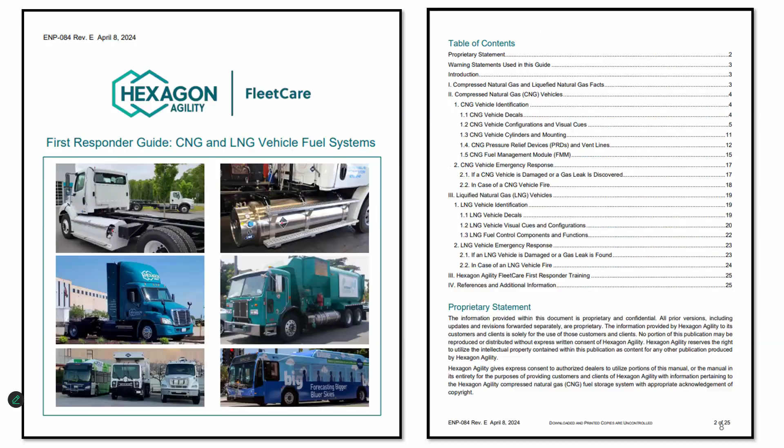We're going to see some photos and videos. The intent of this media is not to do any criticism — it's solely for educational and discussion purposes and to demonstrate things. None of my videos or pictures are meant to criticize or reflect negatively on the individuals, company, or emergencies depicted, if you do happen to identify who they are.

So I want to go into a quick Hazmat 101 view. One thing we're going to find about some of these vehicles is that we're kind of missing the foundation of what we've been taught about hazmat, and we're not applying it to these types of vehicles.

For the past year I've been trying to bring up a gentleman named Ludwig Benner. Sure, many are familiar with him — hopefully the majority are. Ludwig was considered the father of modern day hazmat thinking. He developed a couple of different things: the DECIDE process, the GEBMO, and the TRACEM acronym. A little back history: Ludwig worked for the National Transportation Safety Board, doing incident investigations involving hazardous material incidents on the highway and other transportation. He noticed a lot of firefighters were getting killed or seriously injured at these incidents.

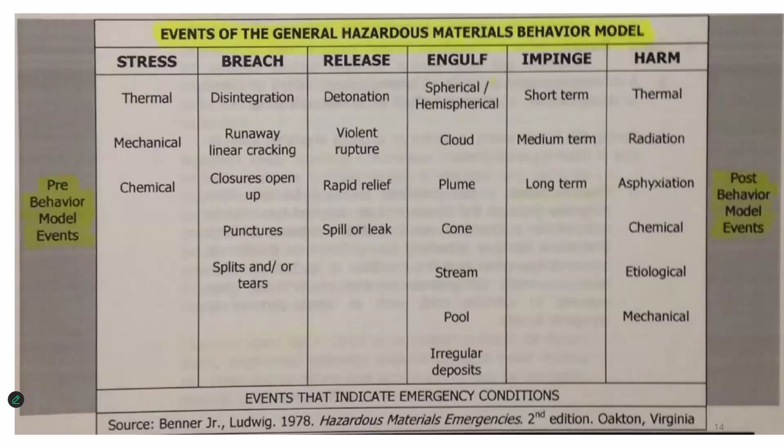Another thing he came out with was just having an understanding. We've all heard that hazardous materials do not become a problem until they get outside their container. So he developed this GEBMO model, which basically outlines the failure of a container, the type of stresses, just to give the responder an actual understanding of what's going on. And we'll see as we go through this how this ties back.

And some of the things that developed out of this were known as risk-based response. Some of you hear this a lot in hazmat classes. According to NFPA 470, it's a systematic process to analyze a problem where we analyze the container, the product, the environment, and the cause. We identify and assess the hazards, and we evaluate the potential consequences. A lot of this is based off of Ludwig's model.

So as you're going to see here under NFPA 470, we talk about the product, the container, the environment, and the cause, and we apply the facts, science, and circumstances. So pretty much my presentation's going to follow this flow.

We're going to have an understanding of the container, an understanding of the product, and an understanding of the environment. Depending where the container fails, the product release and the environment play a role, and we'll have an understanding of the cause. We want to apply the facts, science, and circumstances to the incident.

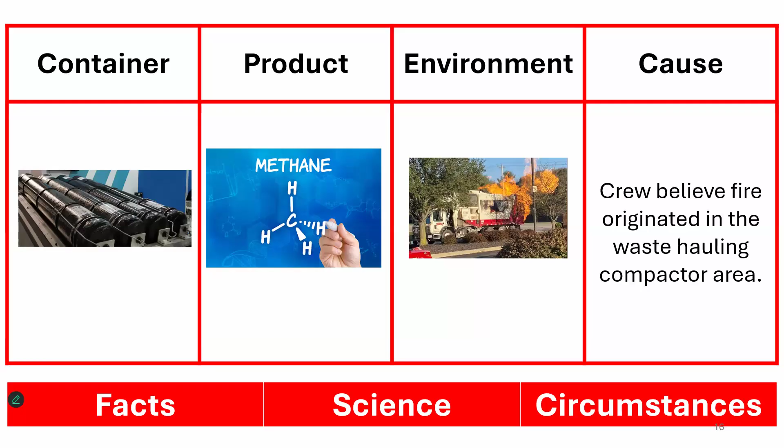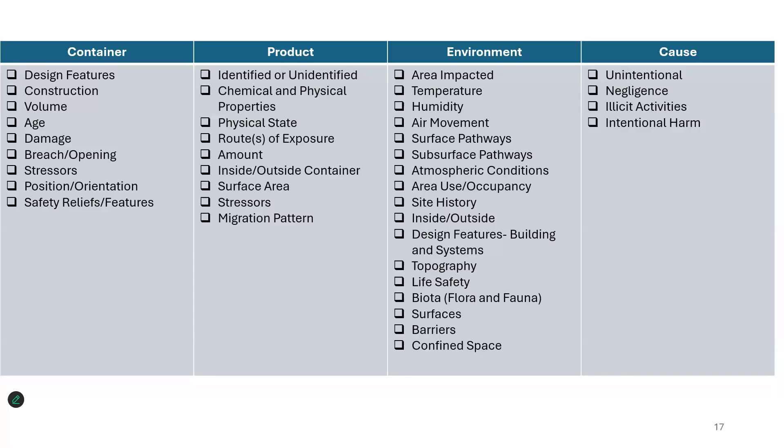Here's just another example of that. I'm not going to go through this, but more particularly you'll see as we go through this about the container, product, environment, cause. The environment is just taking a look at what's our surrounding. As you know, if these incidents occur on a busy highway, it's a completely different environment than these occurring on a country back road. Have an understanding of the cause of these incidents.

All right, so let's dive into the product side of this. First thing I want to stress to you is we can have dual fuel technology where these three fuels could be used along with diesel, so just be aware of that. Basically, a very simple bi-fuel natural gas vehicle runs on gasoline fuel, but with the flip of a switch, we can run on compressed natural gas. So just have an understanding that there could be more than one type of fuel system on the vehicle.

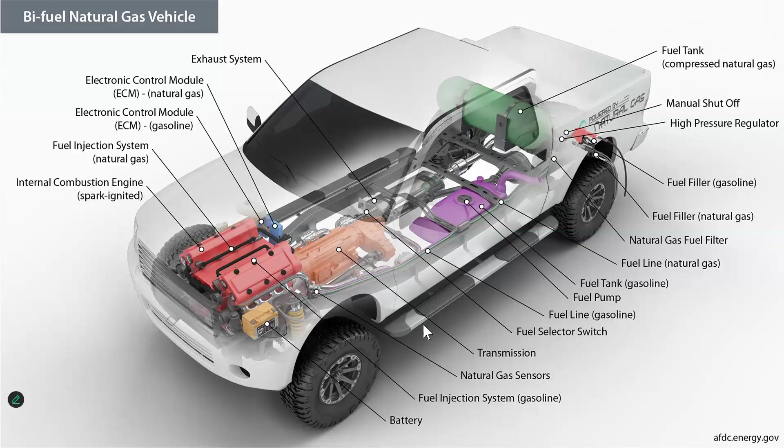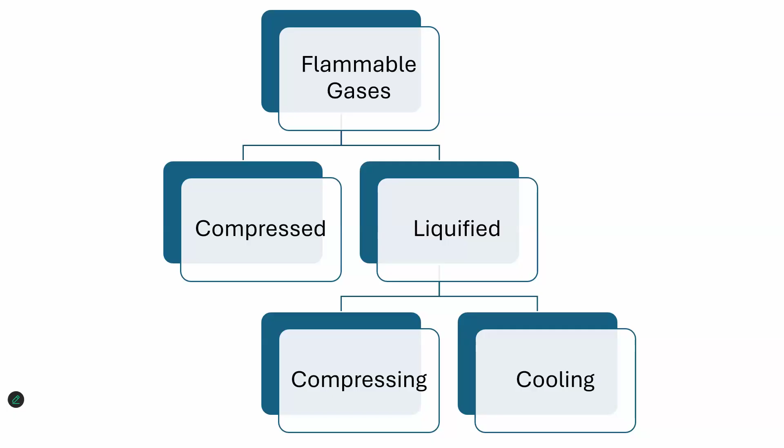You can notice compressed natural gas is a gas, liquefied natural gas is a liquid, becoming liquid through cooling, where they cool the gas to negative 195 to 260 degrees to make it a liquefied gas. Then we get to LPG, or propane, which is liquefied through pressurization.

You can see the UN numbers are different for all three. The ERG guidebook numbers are essentially the same. We understand a little bit about the flammable range, the flash point, the auto ignition, the vapor density, as we've been taught.

Natural gas is lighter than air. It's going to rise and dissipate. Propane, or liquefied petroleum gas, is heavier than air, and it's going to stay low to the ground and collect in low-lying areas. Liquefied natural gas, because it's cold, is a cryogenic liquid, so initially when it comes out it's heavier than air, but once it warms up, it rises.

We take a look at the expansion ratio between liquefied natural gas and liquefied petroleum gas. LNG has an expansion ratio 2.5 times that of LPG. Obviously, all these are flammable gases, so fire and explosion are a main concern. Compressed natural gas has high pressure associated with the containers and fuel system, and we'll talk about what that high pressure is.

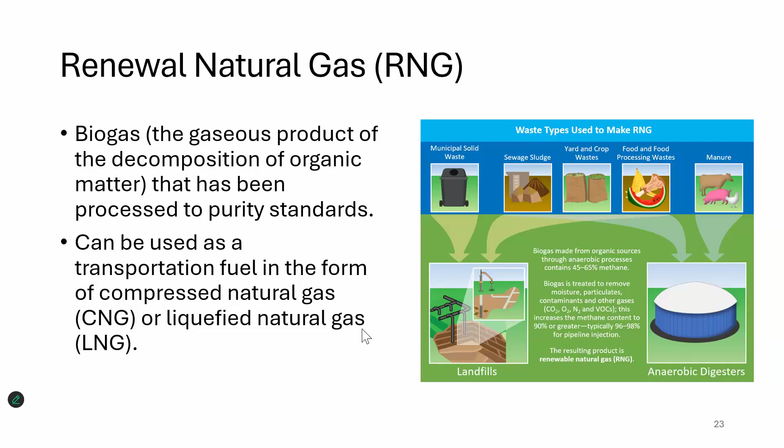So we talked about the product. Let's go in and learn a little bit about the container. Hazardous material does not become a problem until it gets outside of its container.

This is something we need to understand about these systems: pressure relief devices are devices that relieve pressure in a container before the whole container fails. That pressure release device could be temperature activated or pressure activated. CNG is a temperature activated pressure relief device, while LNG and LPG, or propane, are both pressure activated pressure relief devices.

Then we get a bit into containers. Under compressed natural gas, just as many of you have seen in the fire service, we started out with steel cylinders, went to aluminum, to carbon fiber and everything. The same thing has happened with compressed natural gas. There are 4 types, and we'll go over a little bit more about those.

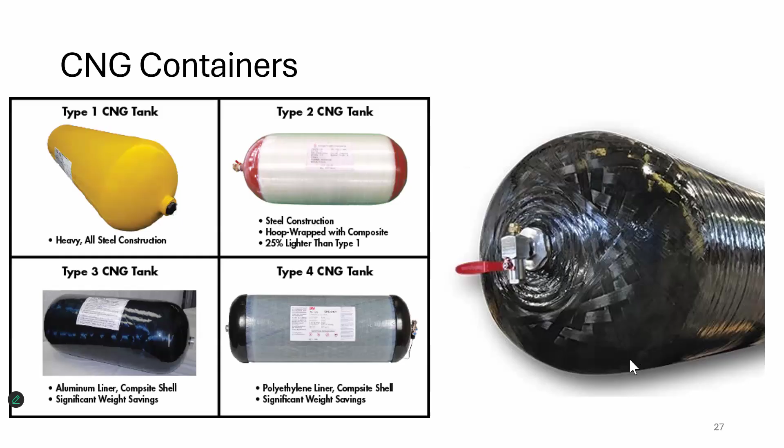The type 3 and 4 overwrap is a low conductor of heat, resulting in a nominal rise in content pressure when exposed to heat and fire. That wrap that is on these containers ignites at 650 degrees.

So what happens as these tanks get exposed to fire? As obvious, we're going to get extreme heat, above 650 or more on these. The fibers start to weaken. Another thing they talk about is if we start throwing our cold fire streams on this, that further erodes the carbon fiber wrap on these containers. So that's one concern.

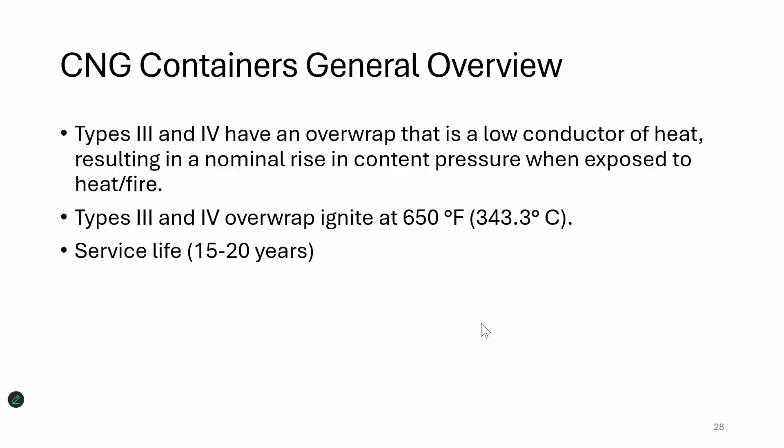The second concern I'm going to emphasize as we get through this presentation is about the CNG, where it has a temperature activated pressure relief device on it. That water could be very detrimental to that. The service life is 15 to 20 years on these containers. As I said, we'll get into this a little bit more.

We're going to talk about how these things vent, making sure they vent upwards. Some of the older systems may do that, may not. The protective caps, and also each cylinder in compressed natural gas systems has an individual cylinder valve that could be manual, electric solenoid - which is the most common - or a combination of manual and electric solenoid.

So we're going to talk a bit about the location of these containers. CNG, we're going to start with that - if we remember back to our poll, it was number 2 on our list. These CNG containers can be mounted on the side, front mounted, side mounted, front body, roof mounted, or mounted behind the cab. Various locations they can put these containers on the vehicles depending on the specific container.

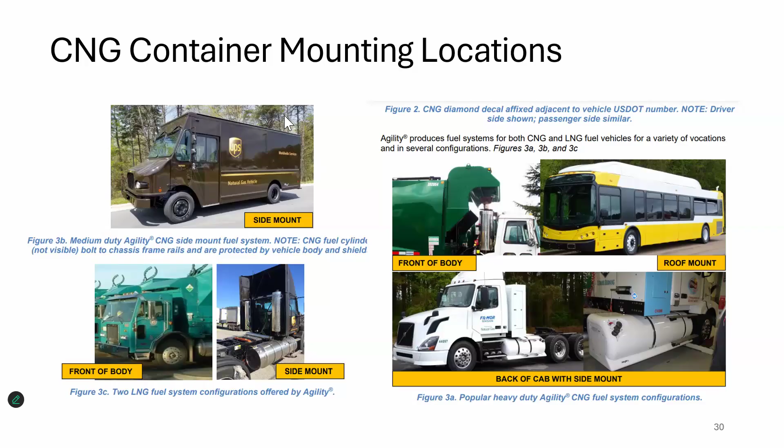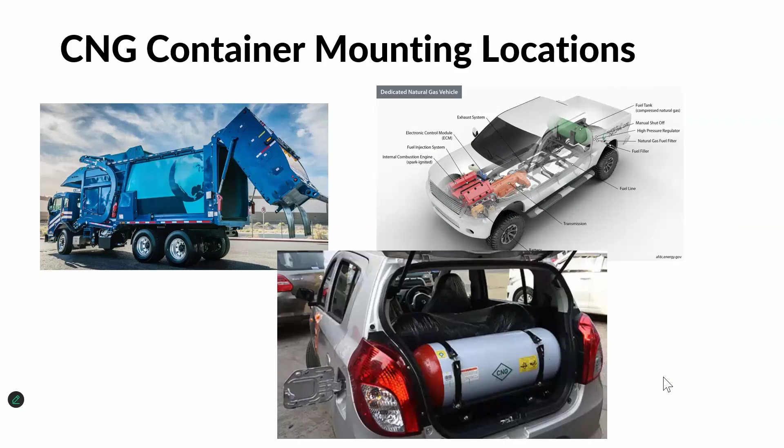So some things about LNG: LNG venting is considered normal. As the day heats up, if this thing was filled early in the morning or late at night and the sun comes up and heats it, it may start to vent off. It's not a problem unless it's considered excessive.

Also on these tanks, I'll show you some upcoming pictures, there's a red liquid valve, which is basically the valve that takes the fuel to the engine. Then there's a gray valve, which is normally closed and is opened when fueling to relieve pressure. So as you fill this thing, you have to open the valve, then put fuel into it to relieve the pressure.

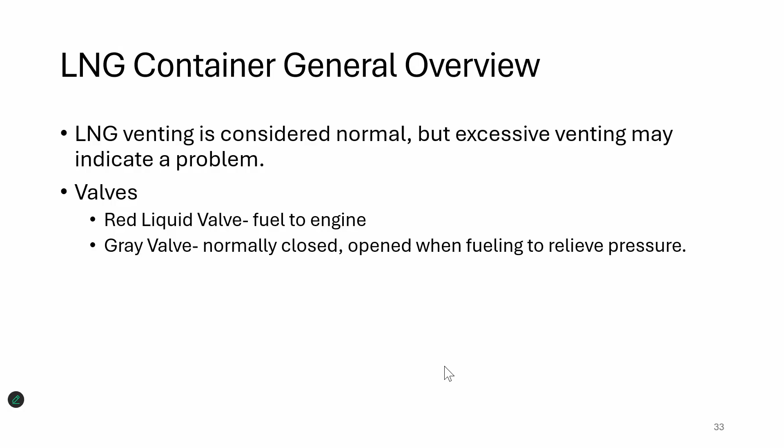As with any container, it has a backflow valve and an excess flow valve that only allows the gas to flow in one direction. And if it's too excessive, such as if the pipe gets sheared, it'll shut itself off.

The key thing on this LNG too is you're going to find a pressure gauge on it. The pressure gauge is not an indicator of fuel level. A full tank could read 0, and an empty tank could have 230 psi, with stainless steel fuel lines on these containers.

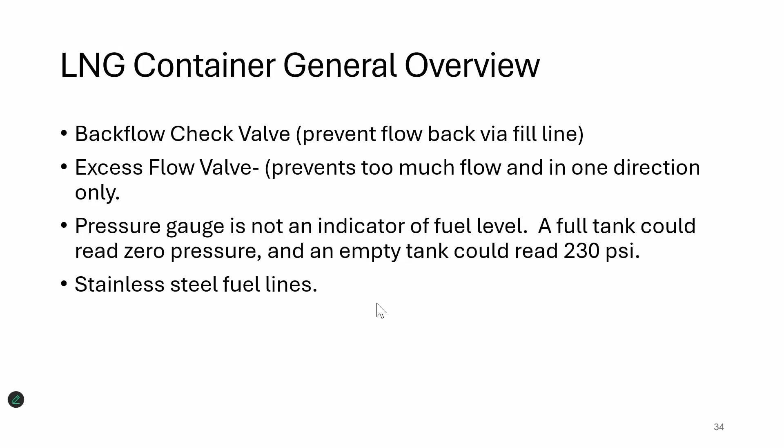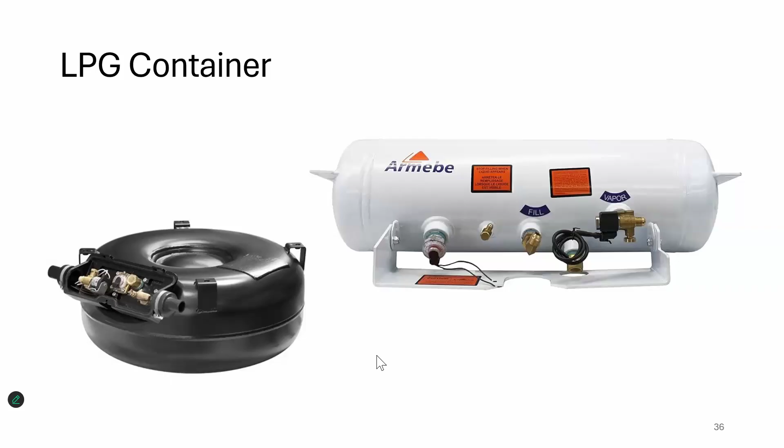With the propane type containers, it could be mounted under the bed of the pickup truck, in the trunk of the vehicle, or under the undercarriage between the rails, which you may see on buses.

The one thing to understand too is propane or LPG containers will never be mounted on the roof of a vehicle, because we understand the vapor density of propane. If we have a leak, where is it going to go? It's going to seek low. So if it's on top of a bus, where is the propane going to leak? It's going to go into the passenger area. That's why propane is always going to be in a lower part of the vehicle.

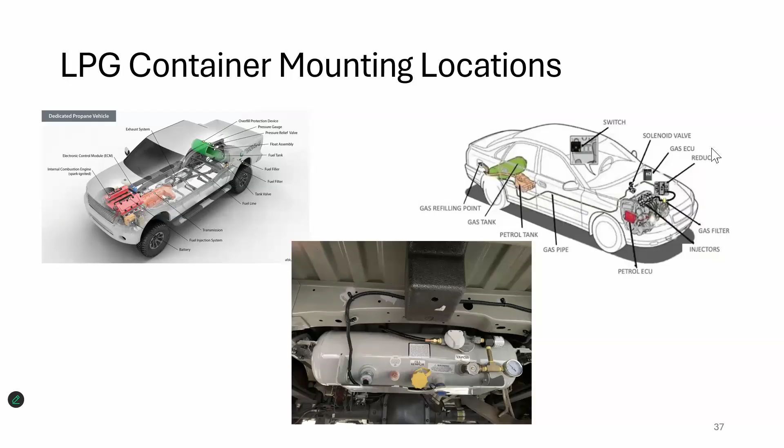All right, so we went over the containers. I've covered a little bit about pressure relief devices, but I want to go over this. This is some critical things we have to understand with these vehicles, particularly with the CNG vehicles.

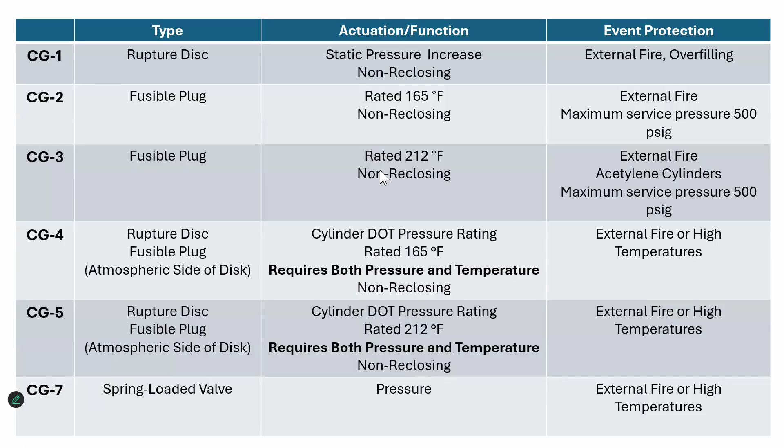All right, this I'm not going to go through, but this is just a quick table that sort of goes over these. So very simple: thermally activated devices, the heat melts a fusible type metal or anything like that, and we have the gas release. It does not reseal back up. Once it's open, it's open.

It's a non-reclosing device. Another thing to understand about these temperature activated devices is it depends how they are installed.

If they're installed somewhere on the tank and the heat hasn't gotten to it, it could potentially fail the container due to the positioning of the fire. Also, these devices may be minimized or ineffective or not go off as soon due to cold temperatures or wind.

So temperature activated devices are non-reclosing. The next type is pressure activated, where internal pressure in the tank operates a spring, it opens up and releases the pressure. If the pressure goes below and has no more thermal stress, it will shut itself back up again.

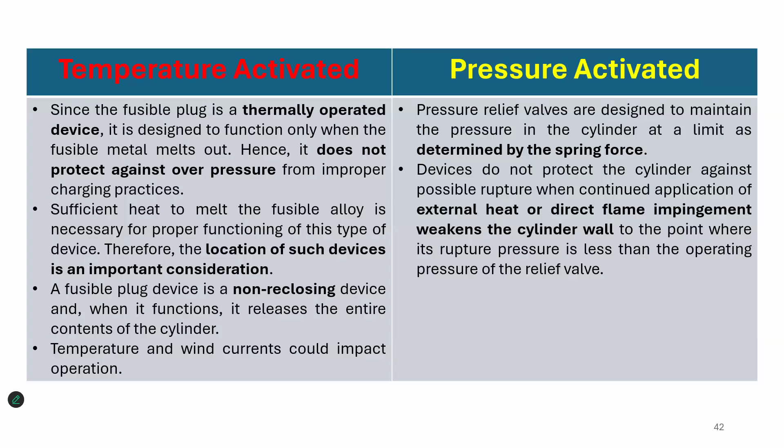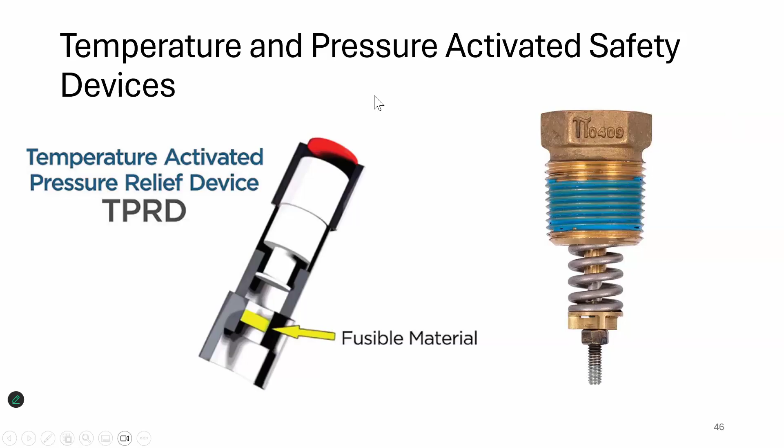This shows the difference. Temperature activated has a fusible material in it, and the pressure activated basically has a spring on it that operates to open and close as the pressure increases. So you can see here a little bit of a diagram.

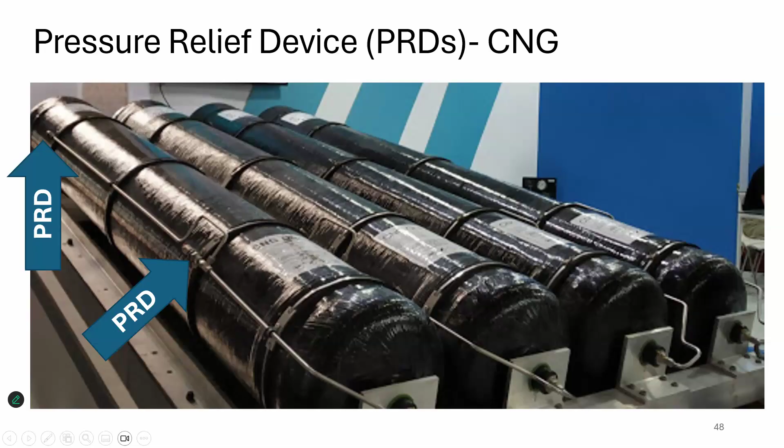One of the earlier issues when these trucks came out, there was no rule on how they could discharge. Some of the trucks could discharge out the side. As a fire service, we're like, well, time out - that can cause some serious harm. So now they're requiring that they go up in an upward direction at a somewhat safe distance.

A lot of the guidelines say 80 to 100 feet back from these pressure relief devices. I'm more about, okay, let's do the 330 feet with the ERG and kind of take it from there, be a little safer, because if we have some kind of a failure, that container, that 80 or 100 feet may not be adequate.

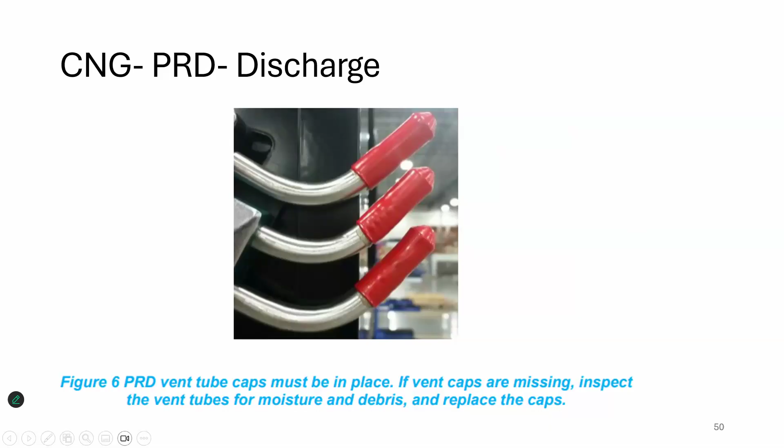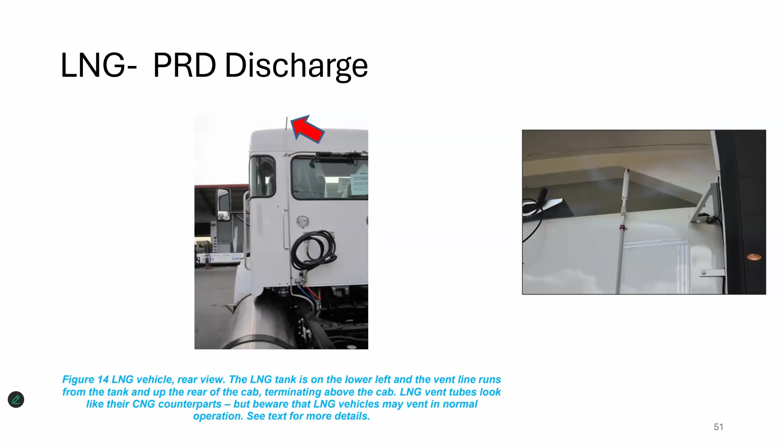Still, if we do get called to a truck stop and one of the things is off-gassing, we just got to make the determination - is there a failure in the device or a stress on the container, or is this just normal operation that there's nothing wrong with the system? It'll eventually close itself up as they start moving on, all right? Also, we can have one down here on the container itself, a pressure relief device indicated here with the red wrapping.

On propane, one thing is it's spring operated. On the buses, it's generally got to be down right on the tank, so you're going to have something underneath of it.

Quick review, especially with fire stream applications. As firefighters, what do we want to do when we see fire? Take that Chesapeake, Virginia incident where they basically let it burn off before doing anything. That's the idea, because if we start applying water stream to that fire and get onto the tank, applying water to the temperature-activated device, we cool it and prevent those fusible alloys from reaching activation temperature. If we prevent that from happening, the container can experience a catastrophic failure.

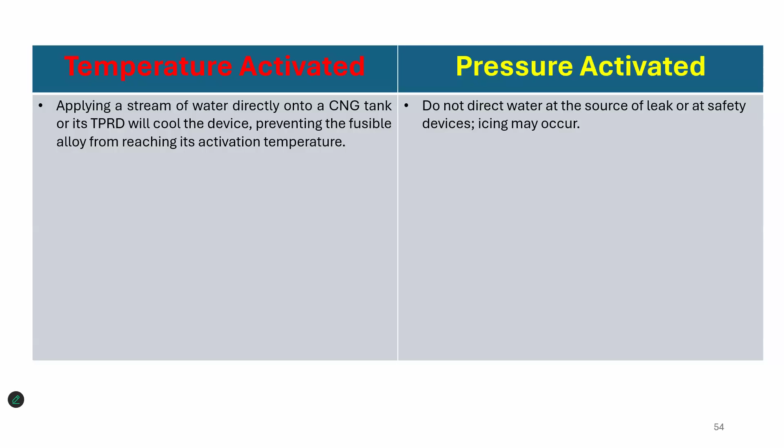On the pressure-activated devices, we've got to be careful where we're directing our water so we don't cause icing or anything to form on the pressure relief device.

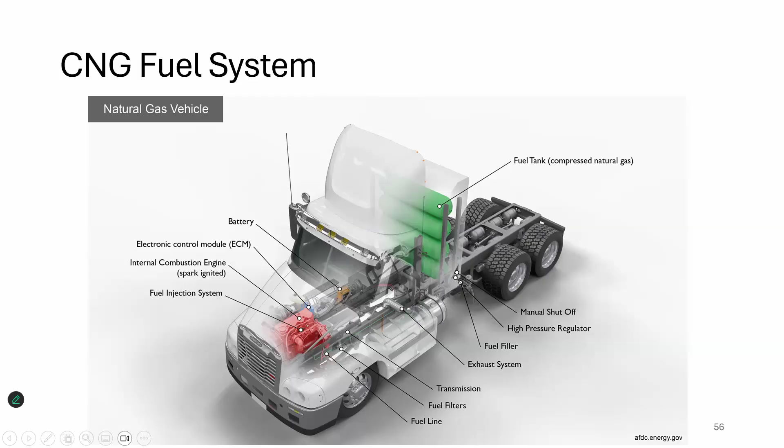All right, components and systems - a little bit of an idea about component systems for CNG. We've got to have an understanding here. Take a look, there's a high pressure side of these containers, there's high pressure lines you can see. Then it comes down here and goes to a fuel management system that reduces the pressure to 125 to 135 PSI. This shows you one of these pressure fuel management systems.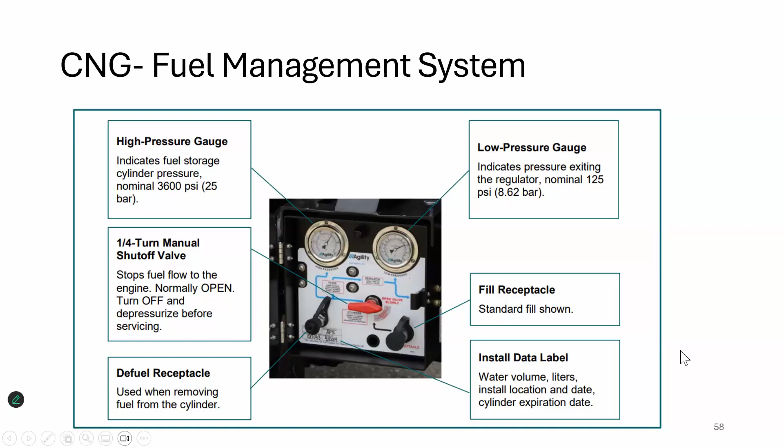The key thing right here in the center is what's known as a quarter-turn shutoff valve. That is, for us in the fire service, part of the immobilization and disabling of the vehicle - a valve that we operate. The fuel lines are going to be some kind of stainless steel type thing, and there may be some flexible hose in those.

We talked about the valves. The valves could be manually operated, they could be electrically operated with a solenoid valve, or they could be a combination of both.

With the solenoid, basically when the driver turns the key on, it opens the solenoid valves and allows gas to come out of that cylinder. If you shut the vehicle off and disable it, and they're electronic solenoids, it shuts down the gas at the cylinder. Each valve also has a shut-off valve on it.

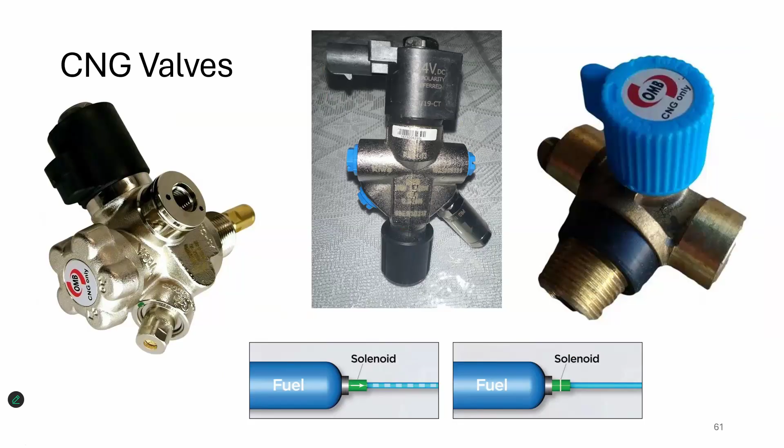Just so you can be familiar with this - it could be part of your size-up, seeing how the piping runs with these, the stainless steel piping, the shut-off valves. Give you a little bit of an indicator what this looks like.

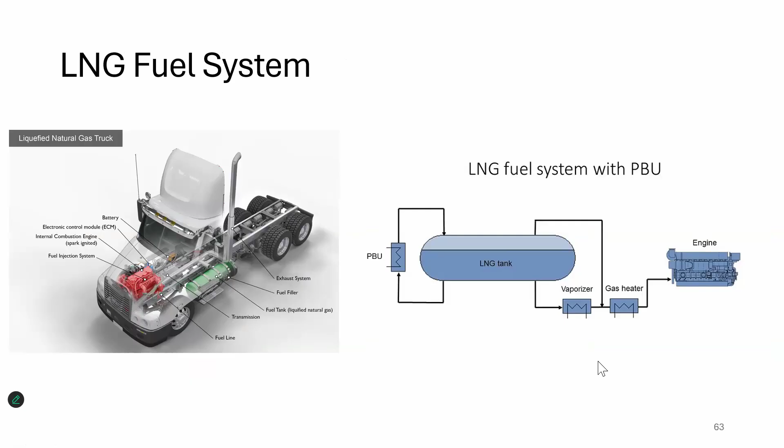On LNG, basically you have the tank, you have a vaporizer and a heater that takes that liquefied gas, heats it up, and gets it to a gas so it can burn within the engine. LNG, obviously, the size and shape depends on how much overall fuel it is hauling. This shows you a little bit about the working.

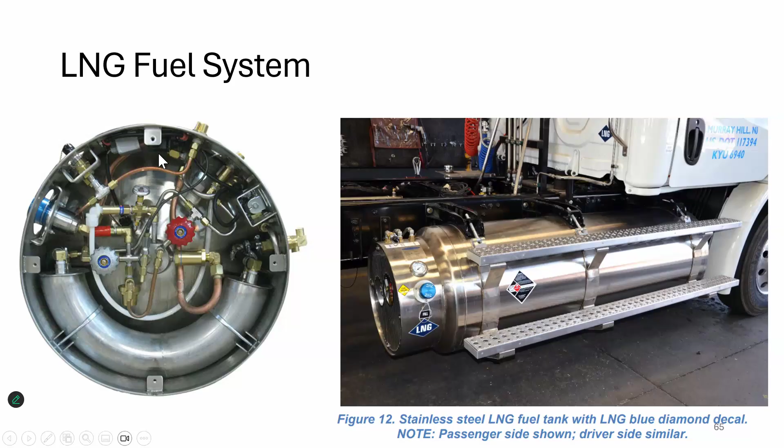Just more things that show you a little about the configuration, the valves, the gauges, and the vents on these systems. And just more on that.

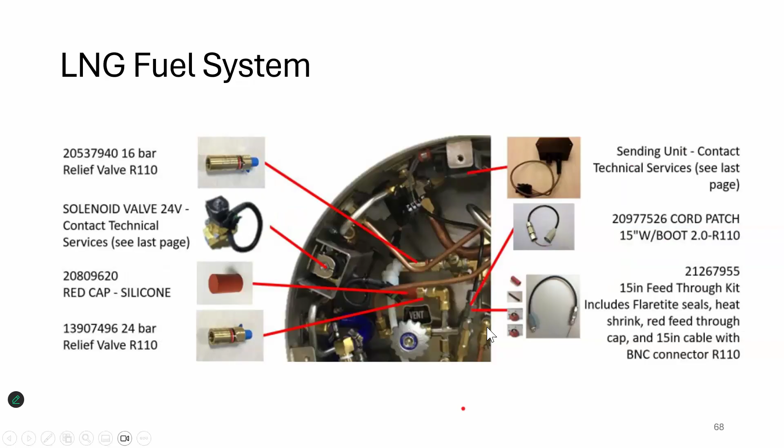One thing I failed to mention when I was talking about LNG versus CNG versus LPG - as we know, natural gas in its normal state is odorless and tasteless. So when we put it into use, we add an odorizer to it, similar to what we're familiar with in our home, and the same with propane. So CNG and LPG type vehicles will have odorized gas.

LNG gas, due to being a cryogenic liquid, is non-odorized. So as part of the requirements on these trucks, they have sensors installed inside and outside the vehicle, and they will give an alarm at 20 to 30% LEL - an audio alarm.

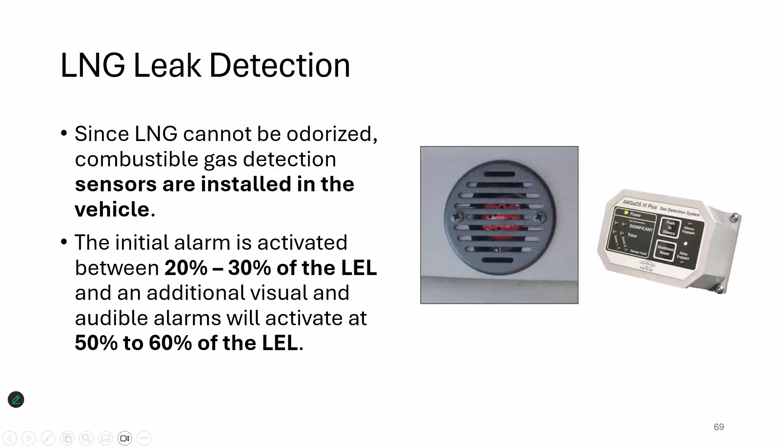That'll also be an indicator that you have a potential leak: these leak detection alarms that are located, in this case, in the cab. This is just on the LNG, because it's not an odorized gas. So with liquefied natural gas, we shouldn't be using odor as any indicator of the presence, migration, or severity of a leak. That's where we're going to talk more about detection and monitoring.

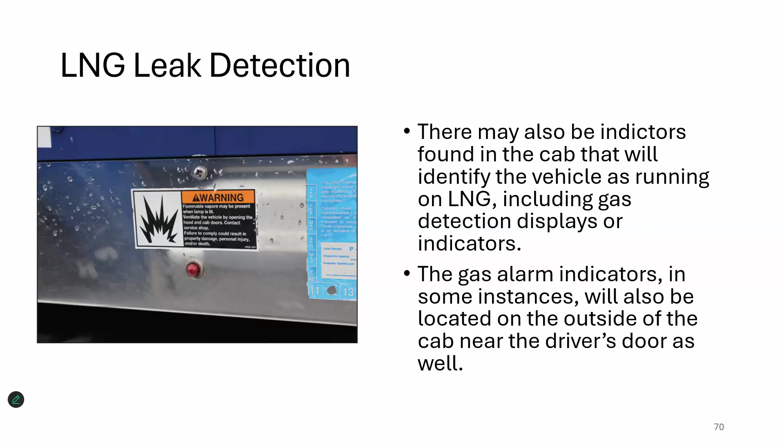So we're going to talk a little about BLEVE hazard. I mentioned BLEVE hazard for liquefied petroleum gas, or propane, and LNG. Real quick review on BLEVEs: for a BLEVE to occur, we need a liquid, we need a closed container, and we need that liquid to be heated above its boiling point, which increases pressure, and we need some kind of structural failure to that container.

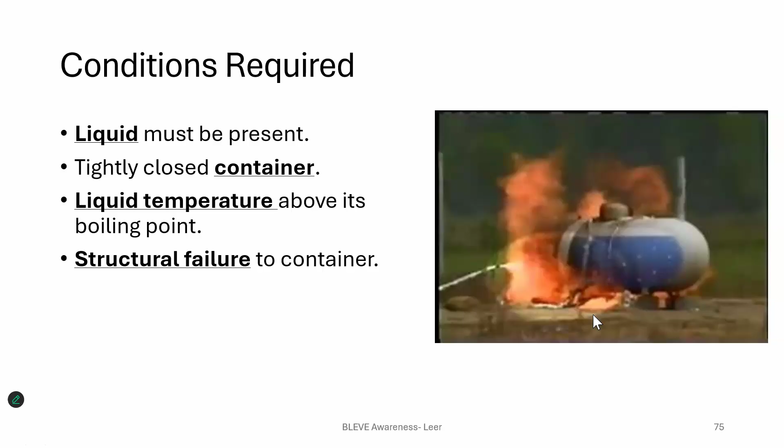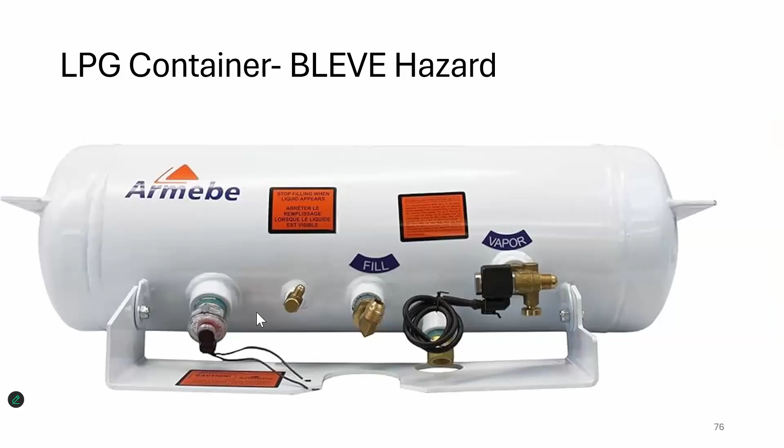Obviously, if we have an LPG-type vehicle, the BLEVE hazard exists. Not going to go much into that. But the one thing I want to hit on is LNG - this depends on where you read it. Some say BLEVE hazard, some say no BLEVE hazard. The reason some say there's no BLEVE hazard is due to the double-walled container design and the cryogenic nature, which limits exposure of flame impingement on the container itself and the liquid. That does not mean it's not going to happen. For example, if there's some kind of stress or mechanical failure on that container, that can increase the potential of a BLEVE hazard. So always consider a BLEVE hazard associated with these vehicles.

Before I move on - I went over the product, the container, a little about the vehicles themselves. One thing that when Ed and I did the podcast, we talked a little about leadership on this. So what can leadership do?

Most important: training and education. Can you get this? This is just a very high-level type class, giving you a little understanding of it. I'm going to give you some additional resources out there if you want a more detailed or hands-on program. So training and education is important.

Many of you expressed that you have these facilities, either refueling, staging or parking, or operation. Do a facility tour - go to them, meet these people, especially these fleet people. Have an understanding: if I do have an incident or a fire, let them understand your capabilities, your limitations, what they can do. Don't have your first handshake with these people when things are going bad on the street - have that talk with these people before the incident happens.

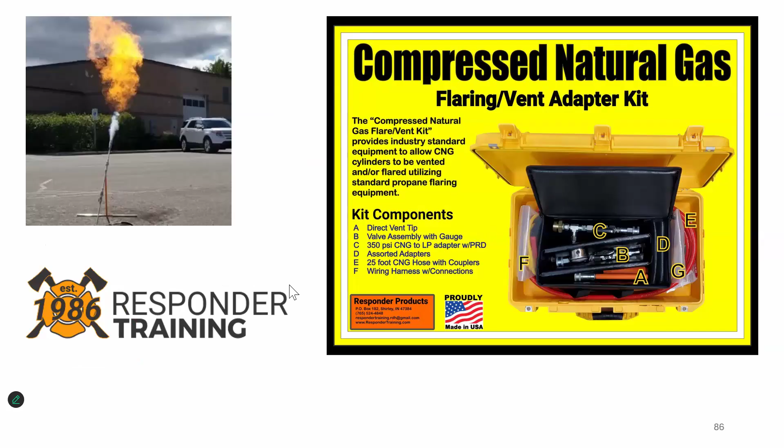Now let's back up here a little bit. As I said, building those stakeholder relationships - get a relationship with your fleets or users. Have an understanding with your tow and recovery services that they just can't come hook these vehicles up and tow them back to their yard. They need to understand there are hazards associated with this. Contact your hazardous material team, find out about their capabilities, or a cleanup company.

All right, one thing on a lot of these vehicles - have you seen with the Hexagon Agility and some others, they have an emergency response guide with them. Some are 20 pages, some are 1 to 2 pages. They're basically a guide for us first responders that give general guidelines on what to do, what not to do, and how to identify the component.

I'm a big proponent, with all this alternative energy in our homes, businesses, and on the road, that the fire service start to look at this from the hazmat side. Assign a science or research officer who can obtain reference sources and provide information to the incident commander - like, this is the vehicle, this is where the shutoff valves are, this is where you can and can't cut, you should not lift or stabilize here. Assign someone who can get that information through a tablet or laptop and get it to the incident commander to work with them on these vehicles.

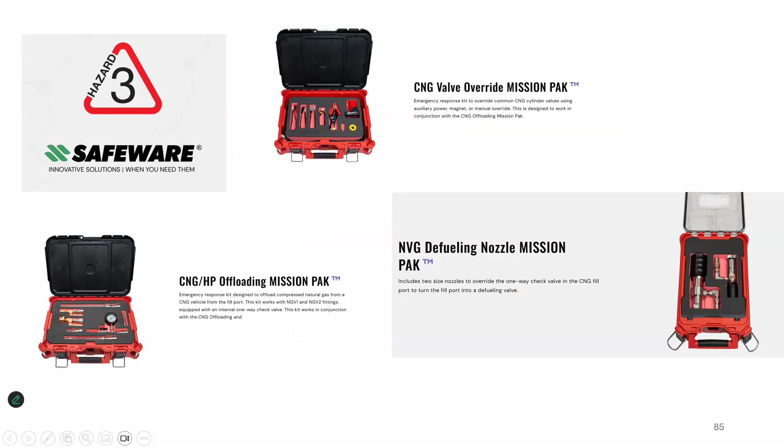Resources, which we already got into, on these types of vehicles. So just stressing some things we need to do ahead of time to prepare ourselves. It's a low frequency but high severity, or high concern, situation.

So as we go through this, let's close a little bit on this webinar. We're going to finish up, probably the last half hour or 45 minutes, on response. I just want to wrap up - I'm going to stray off here a little bit.

Many of you, if you've sat in on Commissioner Mann's and these Provident webinars, know they always talk about the NIOSH 5. You could take a look at this, and I'm sure some of you can think of cases involving these, especially compressed natural gas vehicles, where firefighters got injured. Improper risk assessment - not taking the time to get an idea of what we have, what the hazards are, what the behavior is. Lack of incident command, lack of accountability, inadequate communications, lack of SOPs, and failing to follow your established SOP. You can see all 5 of these apply in some ways to these alternative vehicles.

I know we've all been through the EV hybrid vehicles, but applying these a little bit more. Don't get into tunnel vision on these, especially these larger trucks.

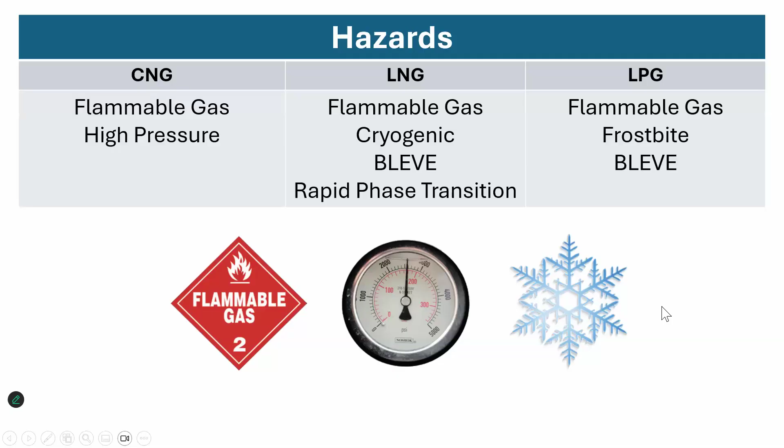As part of our response, I'm going to go back a little bit. Assign a research or science officer. Always consider alternative energy sources until thoroughly ruled out - that could be motor vehicle accidents, motor vehicle fires, structure fires, automatic fire alarms. We need to start putting alternative energy considerations in our size up. We understand solar panels, battery energy storage systems, but start thinking that way too to rule out the hazard, because often they're overlooked.

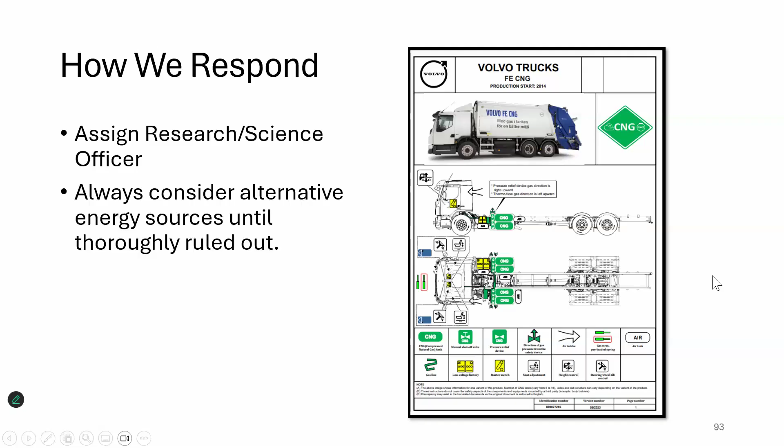One example is what's called the Emergency Response Guidebook for these vehicles, and it's basically what I call a safety data sheet. It shows you the tanks, where the shutoffs are, and the hazards. This is just one sample page from it. There's also, as I pointed out, the Hexagon Agility First Responder Guide for these systems - these quick cards that they have out there for us.

The one thing I want to talk about is the ERG - the bulk guide is more for bulk loading or bulk shipment of these materials. As noted at the beginning of the presentation, Guide 115 is what we use for compressed natural gas, liquefied natural gas, and propane. I just want to call attention to a few things in this ERG book that relate to this topic. If you look in the ERG book, under fires involving tanks, cool containers with flooding quantities of water until well after the fire is out.

Just remember, thermal activated pressure relief devices - if you start flooding that tank, you start flooding those thermal devices, you keep them cold so that they don't activate and you get a pressure buildup. So just be cautious of that type of hazard.

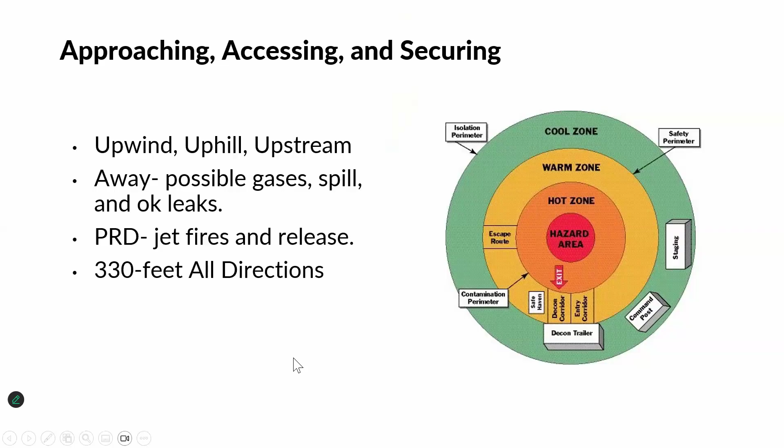Obviously with these, life safety is number one, followed by incident stabilization, then property and environmental protection. That's known as LIP. You arrive on scene, assess the product, the container, the environment, the facts and science. You analyze the problems and hazards, make your decision, develop your incident action plan, implement the response, assess your progress, and maintain situational awareness.

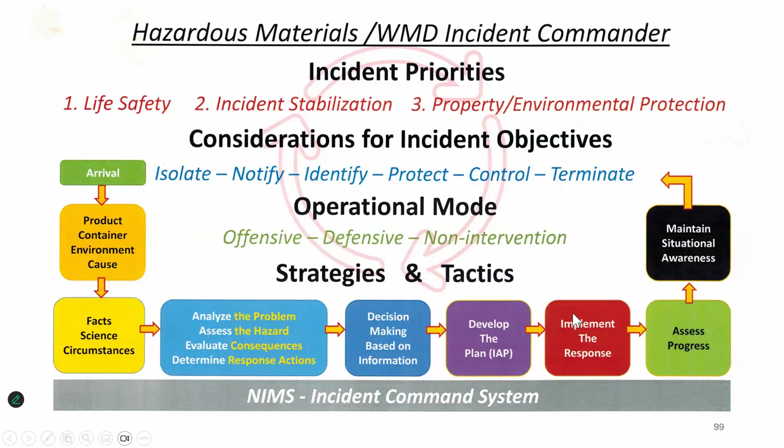All right, we're dealing with flammable gases. Detection and monitoring sampling equipment is important. If we have a leak involving these vehicles, or a fire, we're doing monitoring. I'm a big proponent of layering detection devices.

The majority of us have the multi-gas meter, like the MSA Industrial Scientific, RAE, which does a percent LEL, H2S, and oxygen reading. Remember, that device is an area monitor. It's not always going to detect low levels.

That's why when we go to these gas leaks, we can smell the gas, or know there's a gas leak, but we're not getting a hit. Then the gas company shows up with their device and they get a hit. That's because they're using a leak detection device, which is a different detection technology.

So I'm a big proponent of this, particularly with my fire department. We run the multi-gas meter for area monitoring, and we also run this leak detector.

Another interesting device you'll see here is a methane leak detector. It uses a laser and only detects methane, and it can shoot up to 100 feet. So if I have a truck with compressed natural gas or liquefied natural gas on it, I can stay back 100 feet and scan that truck, and it'll tell me if there's a leak coming from it.

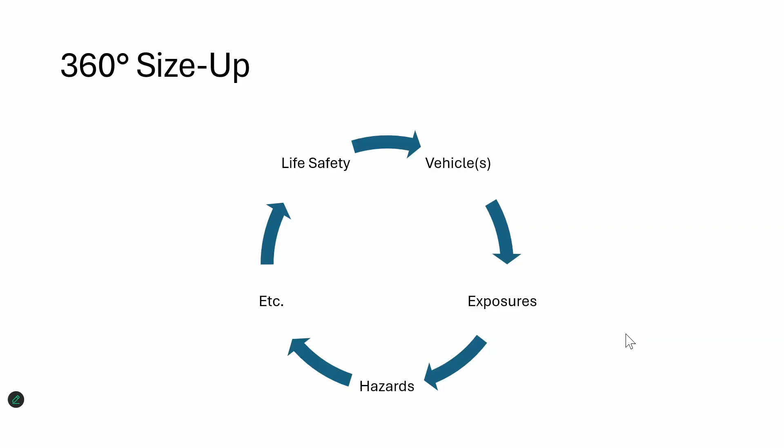This comes from the NFPA manual or student manual on responding to these incidents. So basically: identify, immobilize, and disable. We want to identify the vehicle type, the fuel type, etc.

We want to immobilize, basically prevent it from moving. We want to disable and shut down the vehicle and secure our fuel sources. All this means we must have plans in place, assignments. Thing I like to verify too, trust but verify. If the driver tells you they shut off the valves, trust but verify, because you want to make sure the valves are shut and they didn't make any mistakes in the incident.

All right, basically hazmat 101 stuff. We have all learned the 7 clues. Not going to read through all this, but you can see how we apply occupancy and location. So we talked at the beginning, highway - a lot of us identify highway or roadway systems where these things are coming through, truck stops, parking lots. Take a look at the containers, the vehicle designs, the fuel management system, refueling connection, fuel lines, markings and colors, brandings, marketing, emblems - think green, think clean. We run on clean burning natural gas vehicle.

We'll talk a little bit about the placards and labels, the blue diamonds at the back of the vehicle indicating CNG, LPG, or LNG. Written resources, the manufacturer response guide. I also throw in there interviewing the driver. Our senses - looking at fire and leak behavior, hearing that leak gas noise, that jet flames, little or no smoke, and I'll show you some examples of that. And getting to our modern detection devices, flammable gas sensors, catalytic bead, metal oxide, using our thermal imager camera.

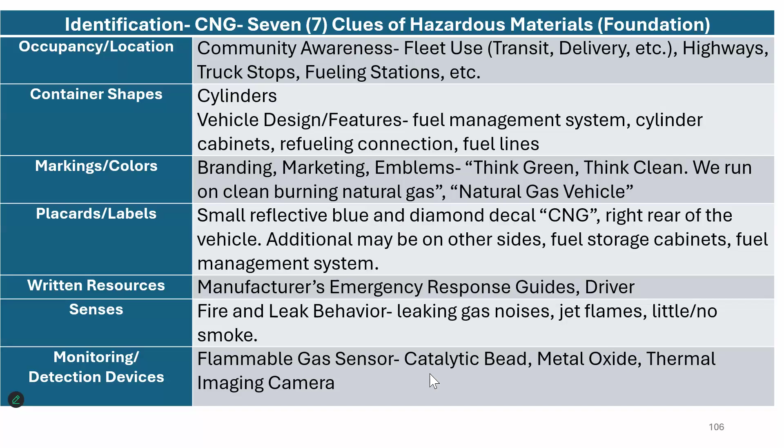All right, as I said, identification - we want to use as much things that we can. The driver, badging and labeling, branding and marketing, the containers, the fuel system, fire and leak behavior, doing that 360, getting a thorough understanding of what we're dealing with. As I go back to it, consider alternative energy until you thoroughly rule it out.

Here's an example, these are the blue diamonds. You're going to typically find them on the back passenger side of the vehicle or maybe on the container themselves, depending. So the top is for LNG - I'm sorry, I missed the CNG is wrong on that - the LNG, the propane. Then you can see the DOT, this is more for bulk loads.

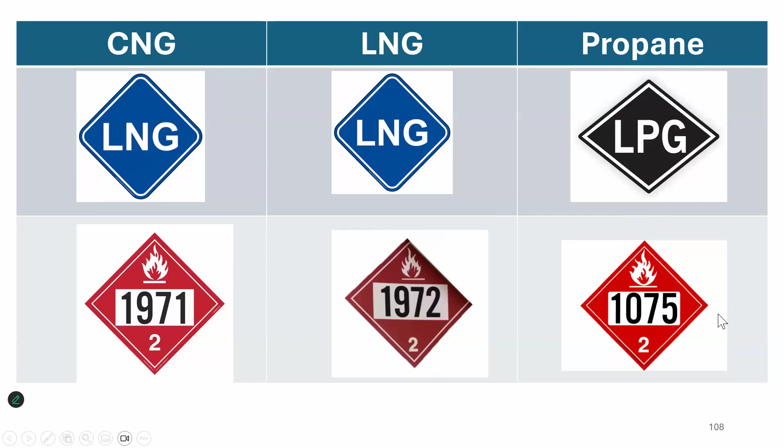All right, so this is just examples, looking at clues like this, the diamonds. It may say at the fuel port, LPG only. These are different clues that we can use when you're doing your 360 to give us an idea.

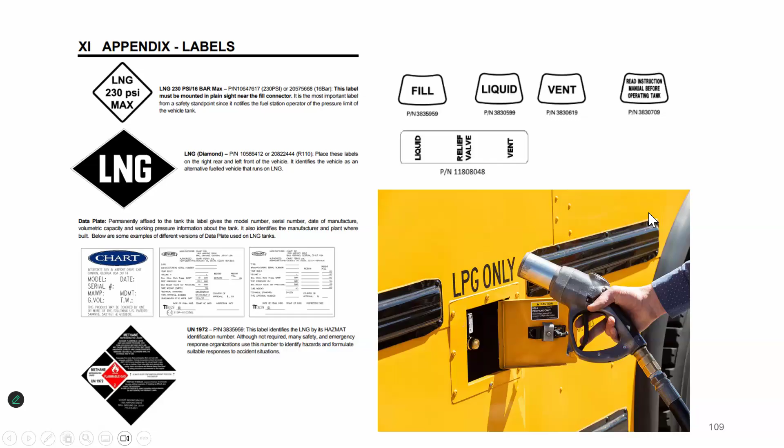All right, another example, LNG on the tanks, propane, but just look at as many clues as possible.

All right, so as we talk with staging and approaching, one thing they talk about is approaching these vehicles at a 45-degree angle, being aware of these PRD flame hazards and everything too. The one thing I want to stress, the 45-degree approach is due to the PRDs and everything. We remember that if we have a BLEVE concern, there's no safe area around a container that can BLEVE. So that goes back to some basic things - there is no safe area if we have a BLEVE hazard or concern. All right, so this 45 basically applies more to the pressure relief devices activated.

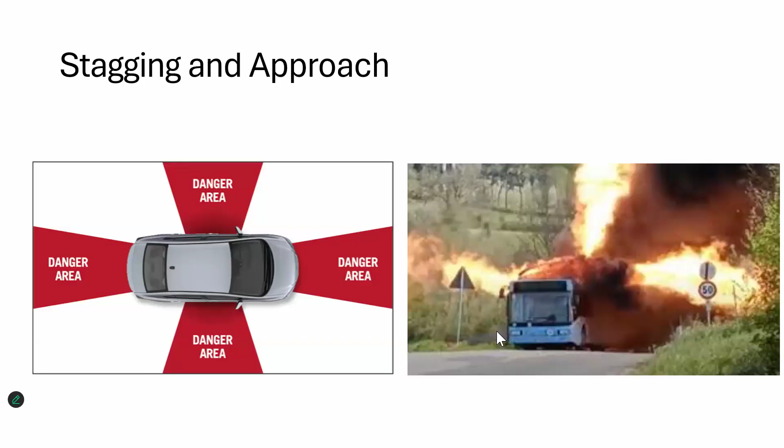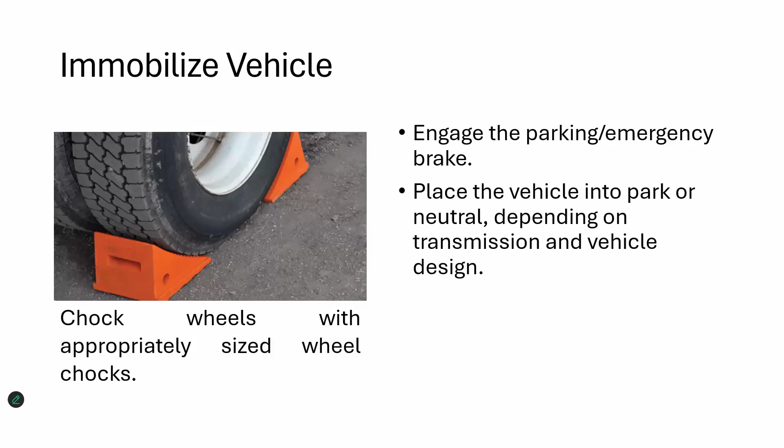All right, we want to make sure we, as part of immobilization, chock the wheels with appropriate size chocks, especially if these are heavy-duty trucks, where we shouldn't really be using the wheel chocks that we use for our passenger vehicles. We engage the parking brakes. We place the vehicle in park or neutral, depending. We disable the vehicle, we turn off the vehicle ignition, we may disconnect the battery terminals - especially one thing we may want to look at, especially on these larger trucks, more than one battery. That's something that maybe we need to take a little bit of training to understand, how to disable these multiple battery type systems.

Okay, next thing, we want to disable the vehicle fuel flow. We saw that quarter turn on the CNG, the shut-off valve on the propane and LNG.

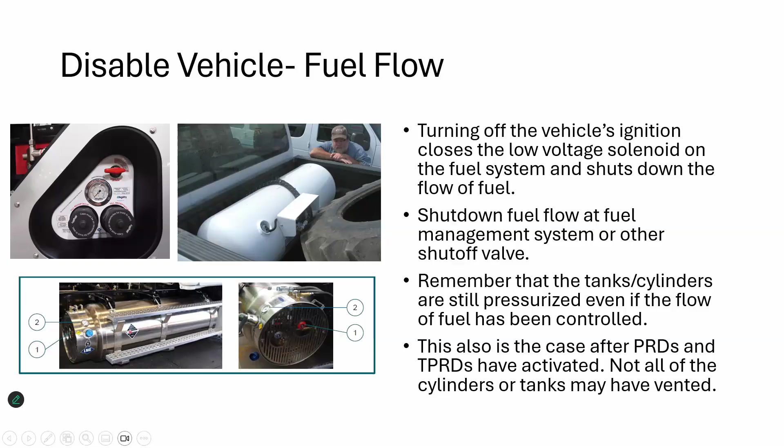So turning off the valve shuts off that fuel securement and everything too. Okay, then basically general emergency operations.

Always treat these cylinders or tanks as if they're pressurized, even if there's evidence that the PRD or TPRD has activated. Not all cylinders may vent. Remember, these PRDs are only for one cylinder, not for the whole system. The pressure-activated PRDs can reset and close. The temperature ones do stay open, but you may see them blow off gas, then shut off and reignite. So they may blow on and off. Don't get a false sense of security if you think these things are shut down.

Get a hose line established. I'm a big proponent, in addition to the hose line, of getting portable fire extinguishers. That gives us some more options or more firepower, and ensure people are wearing the correct PPE. We're dealing with flammable gases.

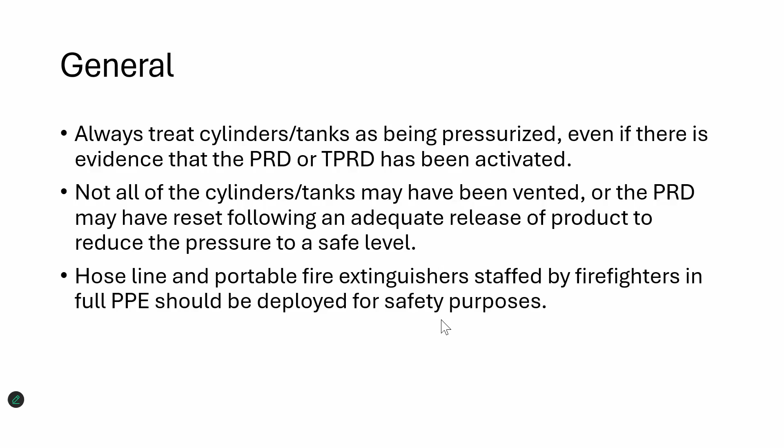Identify and control your ignition sources—flames, electrical arcing. If there's damage in the area of these containers, assume that the container is damaged as well.

Unlike structures with natural gas, we have a limited supply here. So if these things are burning off or venting off, they're eventually going to dissipate the gas and improve the situation for us.

Also, we'll talk about secondary responders at the end of this. Make sure you notify the tow operators what you have. If the police department is going to impound the vehicle, they need to understand this is an alternative fuel vehicle—they may not want to take a damaged CNG vehicle and put it inside their impound building. It should be kept outside.

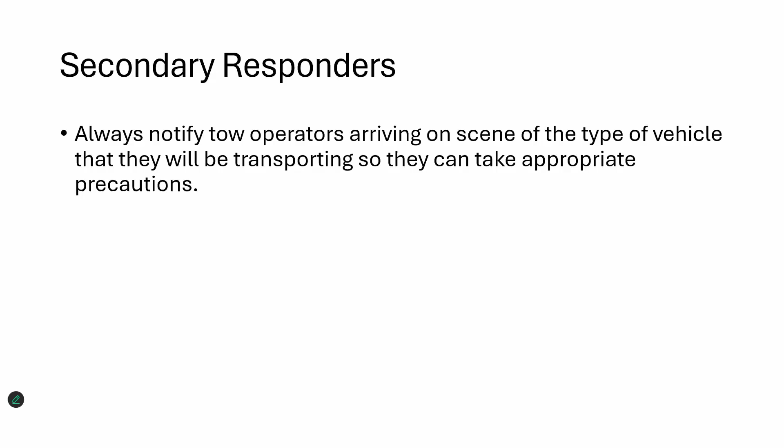All right, so let's talk about some very generic responses for motor vehicle accidents. Extrication, very simple—it remains the same as a conventional vehicle.

The fuel components and lines are not typically put in those areas where we cut, but we still have to peek and peel, expose that area, and look where we're cutting to make sure we're not cutting into it. We should never cut into these fuel lines, particularly the CNG high pressure lines.

We want to make sure we do stabilization. We don't place the stabilization equipment against any cylinders, tanks, or fuel lines. If we have CNG tanks on top of the vehicle, that changes the center of gravity, and we may have to alter how we stabilize it because the vehicle may be top-heavy.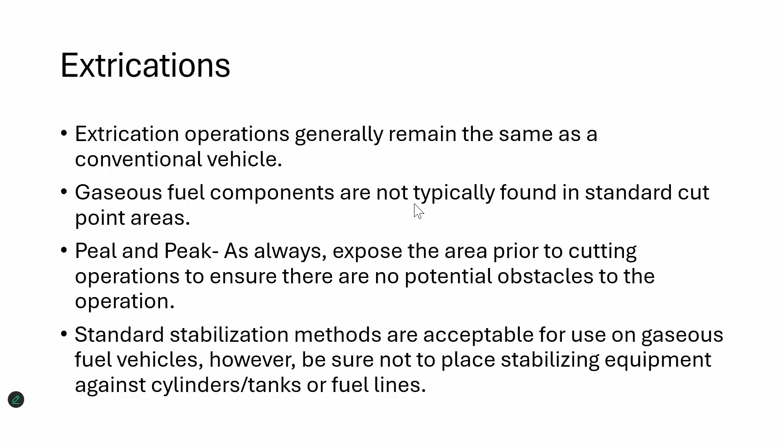All right, so cylinders, as I said, are maintained to maintain their structural integrity. Always be aware that physical damage could result in some kind of failure or gas release, and also consider the gas lines.

Natural gas will rise—it's usually not found low, but it can collect if it's in an enclosed area. So if it's inside a building, or maybe underneath a bridge area where you have a collision on a bridge or tunnel, we have that concern of the gas building up inside.

LNG tanks are very strong due to their double-wall design. The one indication of some kind of failure or puncture is you may see frosting on the damaged area of the tank, indicating there's a leak. This could occur if the outer wall is breached. So just be careful when assessing your LNG containers.

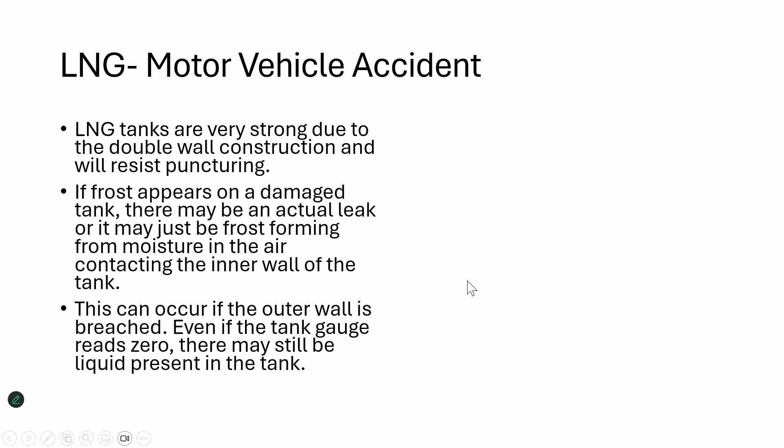LNG will not leave the tank in a liquid state because it vaporizes very quickly. As I said, it will exit, but due to the coolness of the fuel, it's going to stay low until it warms up, then it's going to rise.

Be aware too—remember, I told you these LNG systems have gas detection devices, but if we disable the low voltage system, we essentially disable those gas detection devices. Make sure your firefighters are aware that LNG is a cryogenic liquid—it could cause damage to their turnout gear or their skin if they come in direct contact with it.

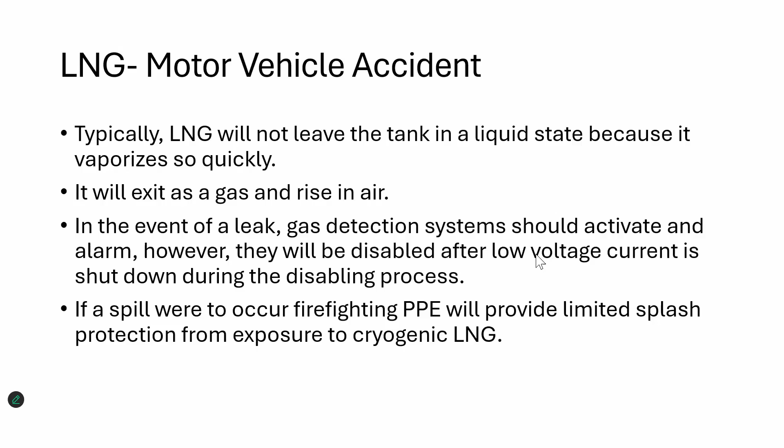All right, so one thing we're going to talk about is under the ERG. This is one of the things that came out in the newest ERG pertaining to LNG—in Guide 115, they added information about LNG gas.

So I did have one video to show, and this will be my last video I show here. This is going to show a little bit of them testing and showing what can happen to LNG.

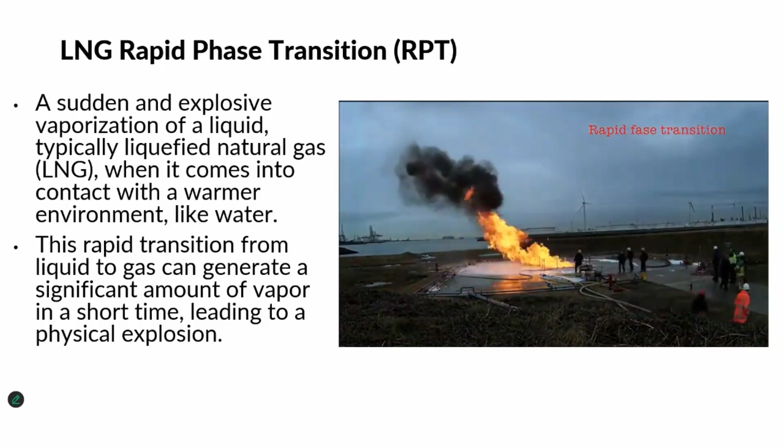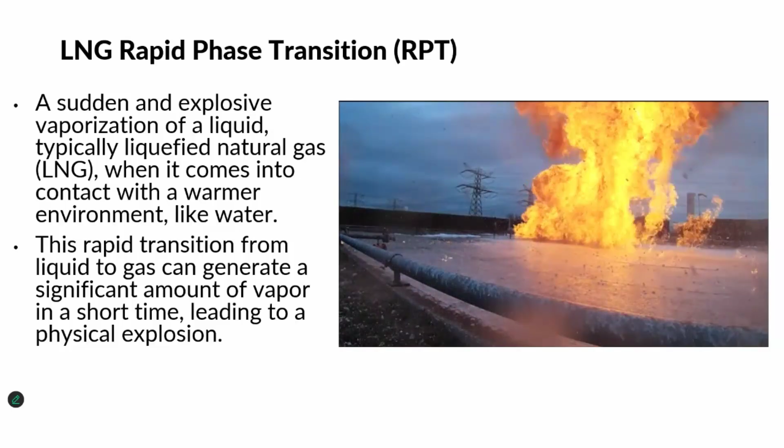Okay, so that was just an example of what LNG can do when it comes in contact with water.

Okay, so with LP, propane, we can have a release. Same thing with the others. Control your ignition source. With propane, if possible, especially if we have a leak, we may be able to disperse the vapors with a hose line, but that's with propane.

Okay, with fires, one thing especially with these garbage truck drivers is they are instructed, if they get a fire in their waste hauling or compaction area, they will dump the load, and this could be any type of diesel type trucks too. They will dump the load to protect it.

One idea is they're dumping the load to get that heat and fire away from those compressed natural gas cylinders. If you're not familiar, and I'm sure Chris Fatt talked about this, and several other people have talked about this, there's an increase of fires in the waste industry because of lithium ion batteries being thrown away improperly, being thrown in garbage. These compactors apply mechanical stress. The lithium ion battery goes into thermal runaway, ignites the garbage.

Okay, so I have that understanding of what's going on. With fire incidents, we want to make sure we determine the type of fuel or fuels and type. We want to see, is it involving the fuel system, or is it involving just the tires, the compartment, and electrical? Is there any fire or heat impingement on the fuel storage system or system components? And do we have any life safety concerns or exposure concerns?

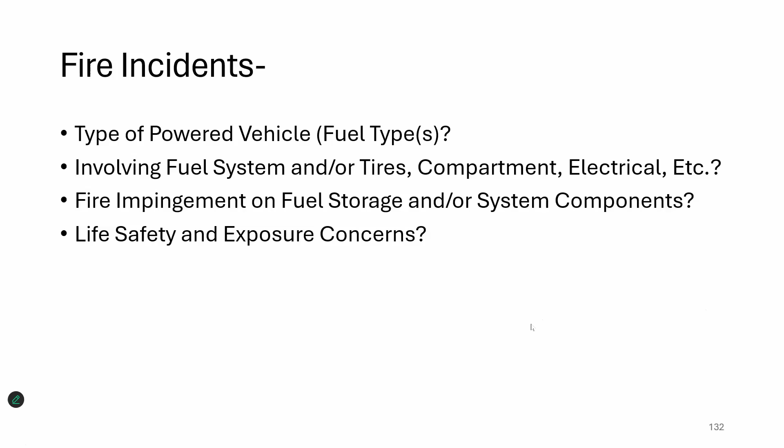Okay, so one thing we could look at, particularly with CNG, is understanding fire and smoke behavior. If I just have compressed natural gas involved, I'm going to have flaming torches, little to no smoke, and I may have an audible release. You can kind of see with this picture. Obviously, this is the natural gases on fire. If the waste was on fire, which it could be, the smoke would be a lot darker.

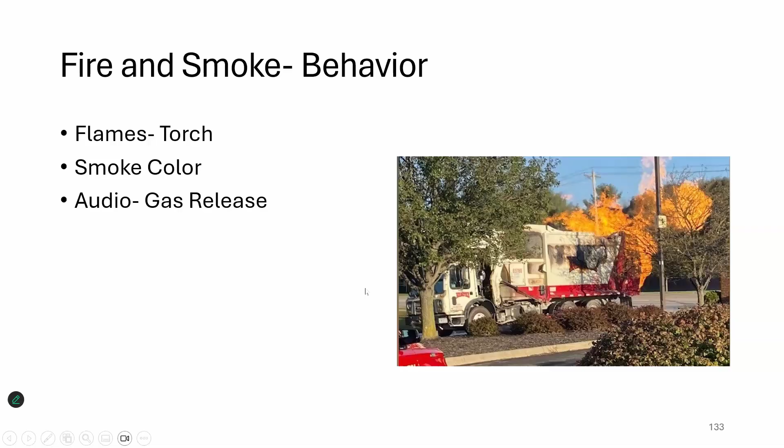So let's take a look a little bit more at this. Up on top of this truck, we have compressed natural gas, but the fire is down here. So most likely, if we look at the smoke, this is involving the tires, the engine. It could be into the low pressure type system.

And the one thing we got to understand too is with these fires, especially in the low pressure system, I may put this out, but if there's a gas leak in the low pressure side, it's going to reignite. So you got to make sure you secure and shut the gas off before you extinguish this.

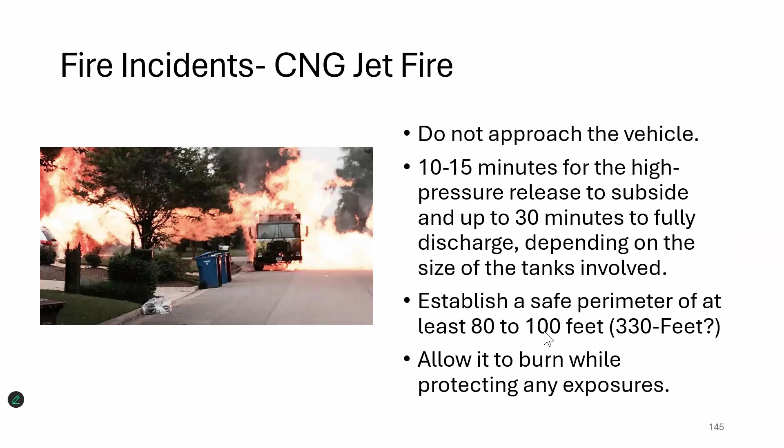Okay, and just be aware, if there's no container or no flame impingement, treat it the same way. Get the fire knocked down, but make sure you're monitoring what's going on with those containers and the temperature relief devices, and don't get any water on those containers.

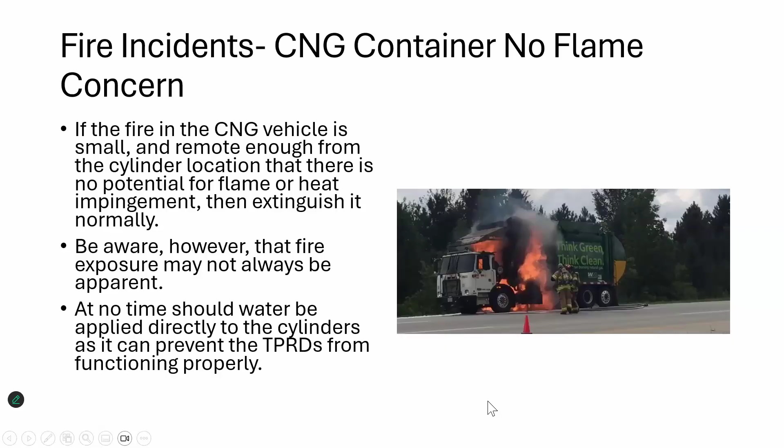LNG, same thing, standard tactics. If it's on fire, allow it to burn. As I said, they're well insulated. They are very unlikely to increase pressure, but however, like the stress - if there's impact damage or some kind of a failure to that tank shell or any other components, that changes the whole ballgame. So always don't get a false sense of security because it's a double wall tank and cryogenic, that all is going to be good.

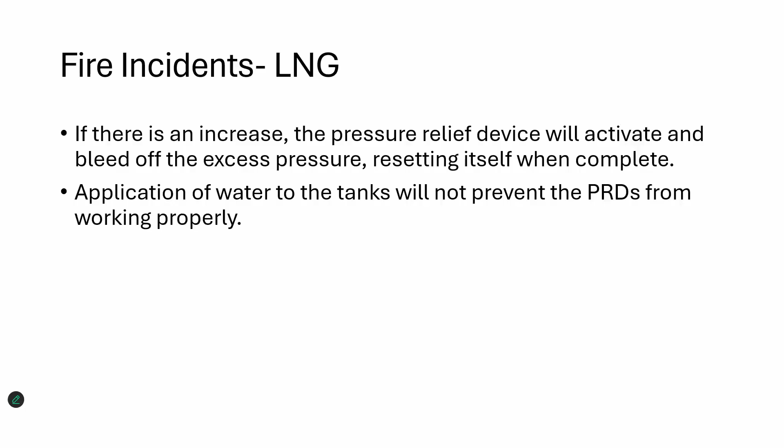Okay, and I said, if there's an increase of pressure, the relief device will activate, it'll vent off and reset. You can apply water to the tank. And also I go with this too, is with LNG and propane, if we're cooling those tanks to prevent BLEVE, consider putting unmanned hand lines, and getting our people out of that danger zone - that's the one thing that we're doing with these.

Same thing pretty much with the propane. Just don't extinguish the fire unless you can shut the gas off. Let it burn itself off and be aware of the BLEVE incident.

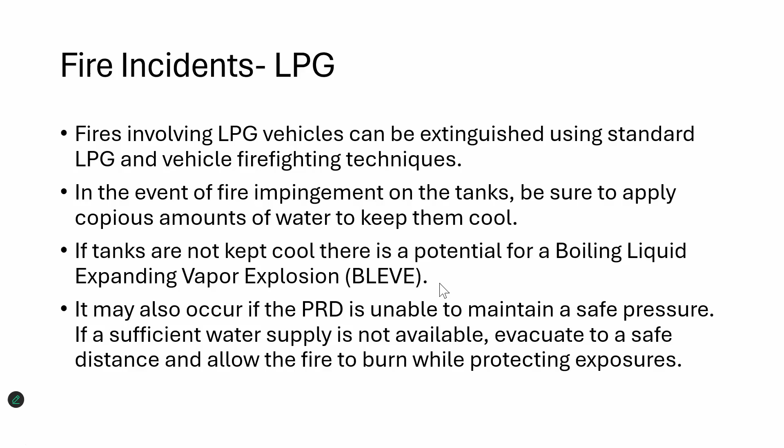Okay, so just to close this out, this is pretty much my last slide. But the thing is with these post incidents, we just can't let these vehicles go. They need to be properly secured, especially if there's damage to these containers, because we don't want these vehicles to return and go somewhere where they can cause harm. So it might be working with a fleet company or another company to get the gas taken off of these things and get them properly rendered safe.

It may be your hazmat team, making sure that your tow operators do. I think that's one of the big challenges is the tow truck operators are just going to want to hook a truck to these things and tow them somewhere, but don't care about if there's a tank failure that could potentially happen hours, weeks, or days later on these incidents.